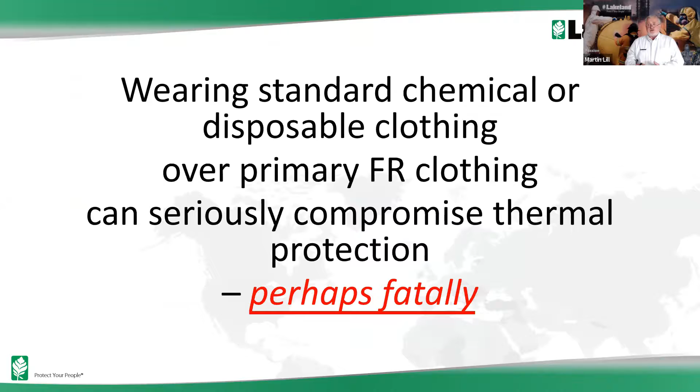But is it proven, you may ask? How do we know this? That is logical, but how do we know it? Well, in Lakeland, we've done testing in the past to prove this point because it's important. And the testing you can use to show it is thermal mannequin testing or predicted body burn testing. So some of you will know that the thermal mannequin test looks something like this.

You have a thermal mannequin, which is a mannequin covered in 123 heat sensors. Each of those sensors absorbs heat energy at the same rate as skin. Then you put the coverall or the FR garment that you're testing over the mannequin, and you subject it to a flash fire from 4 burners around the equipment at a specific calorie energy level, and you will choose a burn length of 2, 3, or 4 seconds. 3 seconds is very common.

And all those heat sensors are connected to a computer, and through that, I won't go into the mechanism, it's pretty complex, but this can then predict the body burn that would occur in that situation. So we've done tests, and here's a body map from one of the first tests we did. Each of those little areas on that map relates to one heat sensor, and the areas that are shaded orange are where it predicts there would be a burn. And in this case, the total predicted body burn was 37%, and there were second-degree burns only.

And that test was done on a primary FR garment only. So that's our baseline test. That's the starting point for us to work from. The body burn that you get just wearing a primary FR garment. 37% second-degree burns only. So then we did another test.

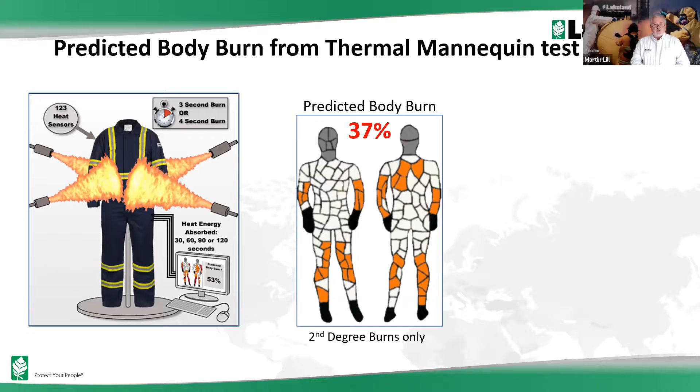We took the same primary FR garment and we put it on the mannequin, and then over that, we put a standard disposable coverall. Polymer-based, this one was a polyethylene and polypropylene mix, and it's a pretty standard disposable coverall that's worn all over the world. And this was the result of the same test. The body burn increased from 37% to 53%.

Not only that, but you can see there are two different colours of shading. There's the orange, which is the second-degree burns, and the red, which are third-degree burns. So they are more critical burns. They're much deeper, they don't heal, they need skin grafts because the nerves are dead. So we've actually increased the burn injury substantially, but also we're getting deeper burns simply because we put the disposable coverall over the primary FR workwear.

So that's the problem. There's the proof that you cannot wear standard disposable or chemical suits over primary FR workwear. You will compromise the thermal protection, and possibly fatally. That 53% is important because 50% is very commonly considered as the possible threshold between a survivable and a non-survivable situation. That's why the NFPA 2112 test in the USA, which requires this test, requires a maximum predicted body burn of 50%.

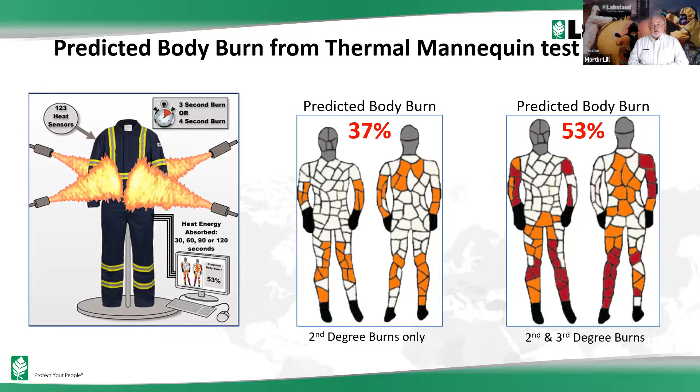Now, of course, you may have been doing this for years. You may have been wearing primary FR workwear and putting disposable garments over it for a long time. And unfortunately, we do hear this in the PPE industry too often: we've been doing it this way for years and it's been okay so far. There was a ship in 1912, and I'm pretty sure that's what they were saying when they were speeding across the Atlantic on the bridge. So far, so good. We've been doing okay so far, and we know where that ended.

You will only have this problem, you will only recognize it, if you have a flash fire event, and if you have a comparison of what the results would have been if you hadn't been wearing the disposable clothing over it. So thinking that it's been okay so far is pretty short-sighted. The fact is, we've proved through that thermal mannequin testing, which is really useful testing, that by wearing a disposable or chemical suit over primary FR workwear, you can substantially increase the injury, the body burn, as a result of a flash fire. So you can't do it.

So the question is, what do we do about it? How can we solve the problem? Well, the answer comes with secondary FR workwear. Now, it's important to understand that secondary FR workwear does not give FR protection. If you wear it on its own, it will give you no protection against flame and heat or flash fire at all. It's not designed to be worn on its own.

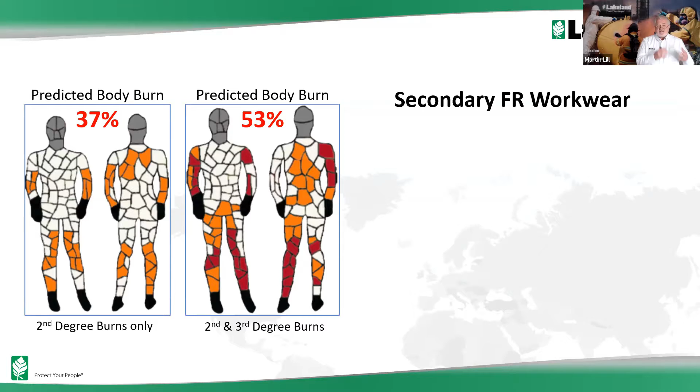What it's designed for is to provide other types of protection, such as chemical, but here's the key, without compromising thermal protection. So that's what we need in this situation. We need secondary FR workwear that actually works, that we know will not compromise thermal protection and will not increase body burn in the event of a flash fire.

So, just 1 second. Just 1 or 2 questions coming, but I think I'll deal with them towards the end.

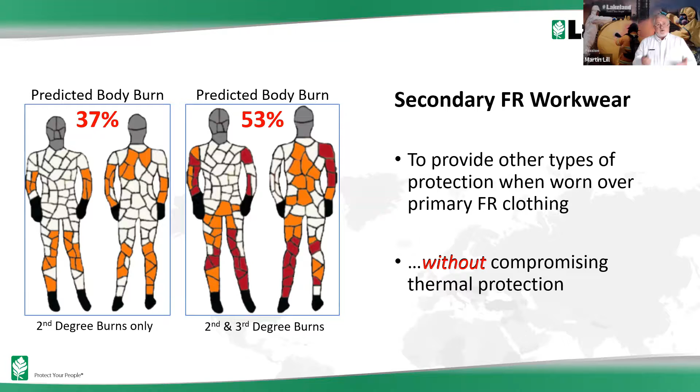So what do we do about this? We need secondary FR workwear, but how do we know any secondary FR workwear will work, that it won't increase body burn? Well, let's look at the standards that we have at the moment for secondary FR workwear, and let's look at whether they solve the problem and whether they tell us the right information to make the judgment. And we're going to look at both USA standards and European standards briefly.

I'm a big believer that our primary consideration here is protection. We don't follow standards and apply standards just because we have to legally, because they apply locally. We follow standards and apply them because they improve protection. And if you approach it that way, then I think we should look at all standards, whether US or Europe, and choose what's best amongst them, because we should be getting maximum protection. But let's look at the 2 standards that apply in this case. In the USA, we have NFPA 2113. And in Europe, we have EN 14116.

So first of all, in the USA, NFPA 2113 could be viewed as a partner standard to NFPA 2112. NFPA 2112 is for primary FR garments. 2113 relates to the selection, the use and the care of NFPA 2112 garments. And it refers to garments that are worn over your primary FR workwear, over the garments certified to NFPA 2112. Unfortunately, there's no testing defined. It doesn't define any testing to assess it.

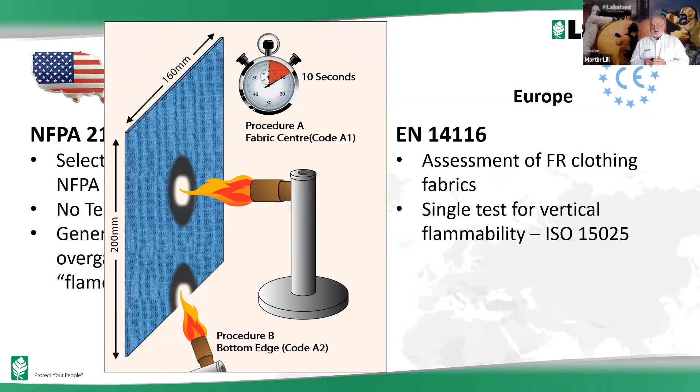And they are index 1, 2, or 3. And secondary FR garments, garments worn over primary FR garments, should be at least index 1. And that means essentially that there should be no burning, it shouldn't ignite, and it shouldn't burn or melt to the edge of the sample. So once that flame applies, if the fabric burns to the edge, to any edge, or melts to any edge, or if there's any dripping, then it will fail and it can't be certified to that standard.

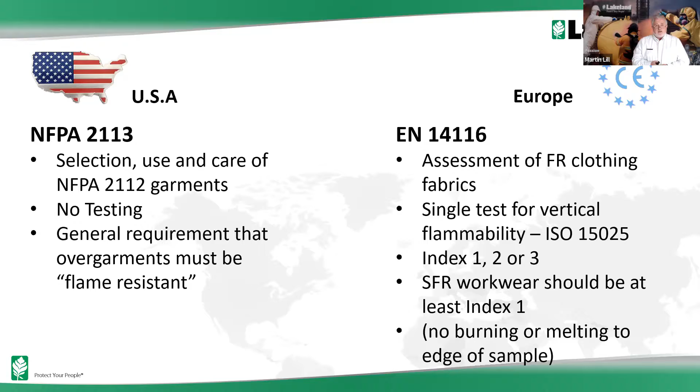So that is better than NFPA 2113. At least there is some testing there, and testing that confirms that the fabric is unlikely to ignite and continue burning. Well, the problem is, it's not actually testing these garments in the way that they are used in the real world. That is, as worn over primary FR workwear. There's no testing that looks at that at all.

So my view is that the current standards in North America and Europe simply fail to provide effective testing for secondary FR workwear, which is a concern, or at least it was, because there's a new name in town for secondary FR workwear, and that name is ANSI 203. Now, I'll confess here, this was actually introduced in 2018, but I only found out about it when I was in the USA 2 weeks ago. And when I looked into it, I was very encouraged.

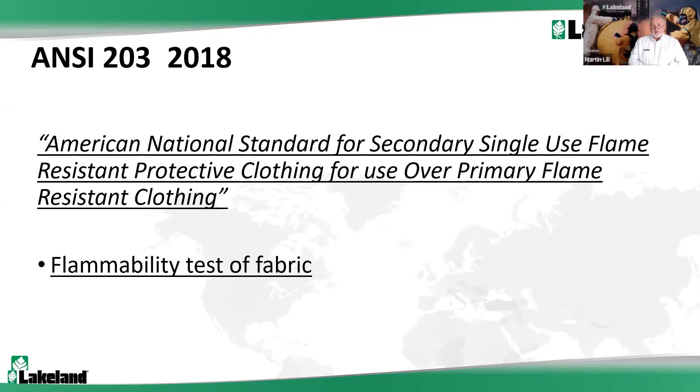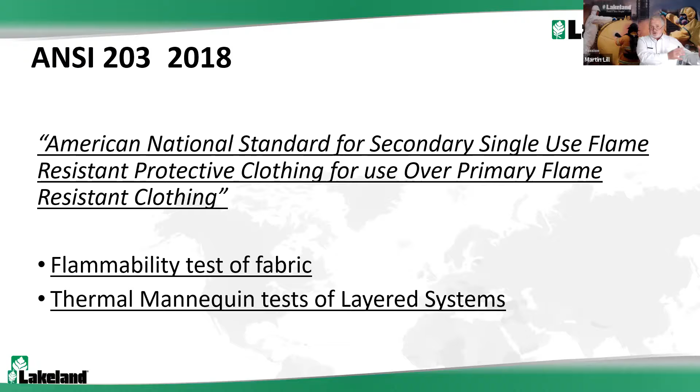Now, ANSI is the American National Standards Institute, and this standard is the American National Standard for secondary single-use flame-resistant protective clothing for use over primary flame-resistant clothing. So it is specifically designed for testing of garments that are intended or may be worn over primary FR workwear. And it contains two required tests. First of all, there's a flammability test of the fabric, which is similar to that vertical flammability test I've just shown you in the European standard. But more importantly, it requires thermal mannequin testing of the layered systems to predict body burn in the way that we saw earlier in the presentation.

So what it does is this. It requires two tests. First of all, it requires a test on the primary FR garment alone, as we did before, to prove the point about wearing standard disposables over primary FR workwear. So that's the first test you do. Again, that's the baseline. And then it requires that you do the same test where you test the garment that's going to be worn over the primary FR workwear as it's used, i.e. over the same primary FR workwear. So you do two tests, the second one being the layered system, and you have to do them at the same time.

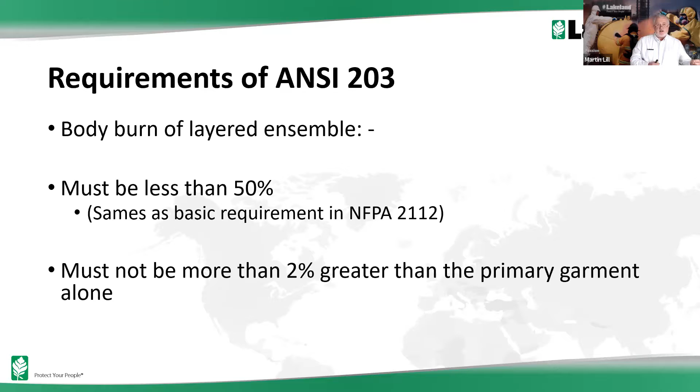And it requires two things. The body burn of that layered ensemble, the second test, first of all, must be less than 50% predicted body burn. That's the same as the basic requirement in NFPA 2112, and it relates to that concept that 50% is the sort of survivable, non-survivable threshold. But more importantly, it requires that the predicted body burn of that layered ensemble must not be more than 2% greater than the result of the primary FR garment alone. So that's exactly what we need for secondary FR workwear.

ANSI 203 tests secondary FR workwear as it's used in the real world, as a layered system over primary FR workwear. And secondly, it ensures that secondary FR workwear at least does not increase the body burn, not substantially, not more than 2%. So for the first time, we've got a standard in ANSI 203 which actually provides the testing needed for secondary FR workwear, which is great. Now, I know this is a North American standard. Like most North American standards, it's not compulsory, it's voluntary.

But whether you are in North America or anywhere else, my suggestion for any garments that you wear over primary FR workwear would be that if you don't follow this precise standard and apply it specifically, you should at least apply its principle. So if you're wearing garments for any reason over primary FR workwear, you need to have thermal mannequin testing of the primary FR garment on its own and the combination of the two garments to make sure that the secondary garment is not going to increase body burn and that it will not cause a hazard. Because you saw with the disposable test earlier on just how much the thermal protection from the primary FR garment can be damaged by wearing the wrong garment over it.

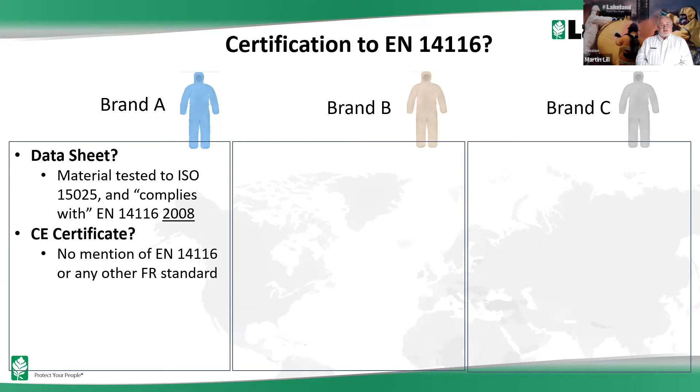But what about the actual certification? So I downloaded the CE certificate and was surprised to find there's no mention of EN 14116 at all, or any other FR standard for that matter. So basically, this brand A is not certified to any FR standard at all.

What about brand B? Data sheet claims flame retardant, and it claims flame resistant treatment in another point on the data sheet. But when you download the certificate, again, no mention of EN 14116 or any other FR standard. Again, like brand A, brand B is not certified to any FR standard.

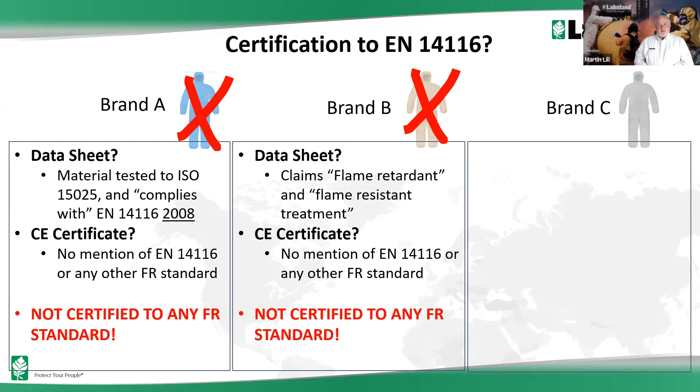Brand C, the label states that it is certified to EN 14116 2015. But actually, if you read the Declaration of Conformity, it claims it's certified, but applicable to the fabric only. Well, as I said, the 2015 version of the standard specifically introduced new requirements for testing of the components, the zip and the seams, and it specifically requires, for obvious reasons, that the zip must function at least once after the test. But this is to the fabric only.

My understanding was that you can't certify to part of the standard, but this brand C appears to be certified to a bit of the standard, part of it. So, okay, let's give that one the benefit of the doubt and at least put a question mark.

But the point is, lots of people in the market, they were very commonly sold. Interestingly, I was told a couple of weeks ago that they're not actually sold in North America now, probably because of that new ANSI 203 standard. But these are very commonly sold in the rest of the world. But actually, if you look at them, the FR claims are certainly not backed up by proper certification.

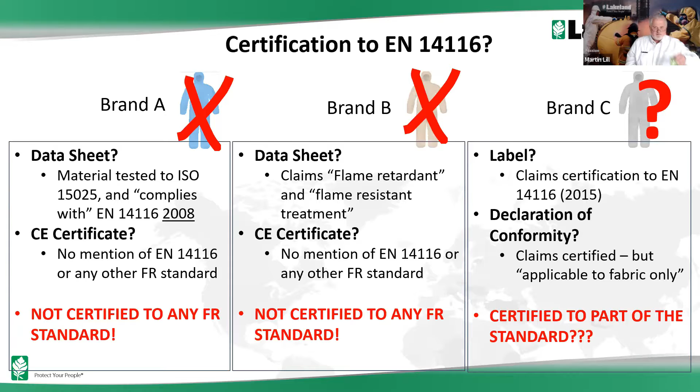So, okay, we thought, let's look more into these products and let's do some independent flash fire testing of these garments, like we did before. So first of all, we did this 2 or 3 years ago. We did a flash fire test, that thermal mannequin test, on a standard SMS product worn over primary FR workwear.

So this is the version of this garment that's not FR treated. It's the standard plastic disposable coverall, and the resulting body burn was 20.5%. Now we'll note that's different figures to the previous ones. That's because the parameters of this test were different. We chose for various reasons a shorter burn in this test, so the body burn level is lower. But it's the comparison of body burn that's important. So that was the first test on the non-FR treated garment.

And then we repeated that test with the FR version of the same garment, the one that's treated as FR and claims to be flame resistant. And the result was this, 19.6. Hey, it's lower, but it's less than 1% lower. And interestingly, there's still second and third degree burns. And actually, if you look at the proportions, we found that the third degree burns in the second test were actually more than in the first test.

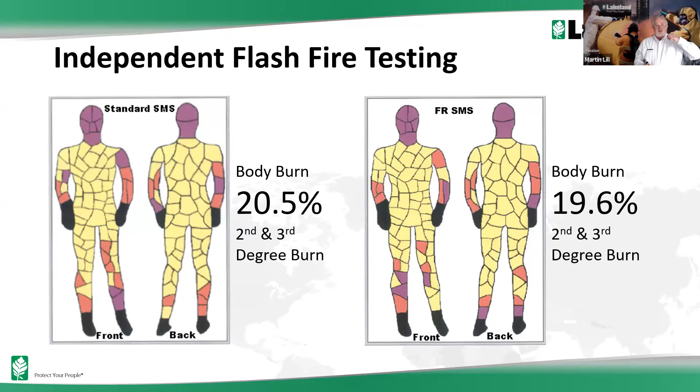So what's that telling you? It's telling you that, okay, one has an FR treatment, but when it comes to how these garments are actually used in the real world, you're not really getting any difference in performance between the FR version and the non-FR version.

So just summarizing the points about those FR garments that are in the marketplace right now, and the big brands, the manufacturers are not providing any body burn prediction tests, any flash fire testing. I think that tells us something. Brand A and Brand B are not certified to any FR standard. Brand C apparently is certified, but it's ignoring the requirements that were introduced in the 2015 standard.

And finally, the independent testing that we've done suggests there's almost no difference in the performance between the FR and the non-FR version. So the question I would ask is, what are you paying for? Because you will pay more for the FR version than the non-FR, but you're not really getting any difference in performance.

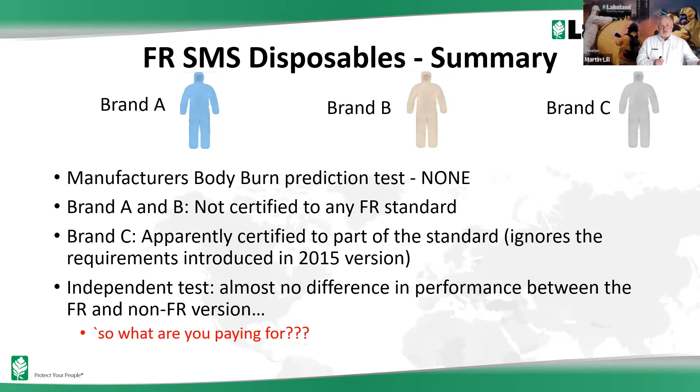So one of the takeaways I would hope is that if you are using these FR disposables, then I would suggest that you go away and have a look at the detail, have a look at what it says in the data sheet, have a look at how they are certified and whether they are certified to an FR standard at all, and then make decisions accordingly. Because maybe you need to find something better that is proven to work.

So I'm going to draw some conclusions now. I think you've listened to me for long enough. But what have we learned from this? I think there are 4 key things. First of all, you really cannot wear standard disposables or chemical suits over primary FR clothing. You can't do it. We saw in the testing that you can critically damage the FR protection that you get from the primary FR clothing. So if you are doing that, you are putting workers at risk of serious injury.

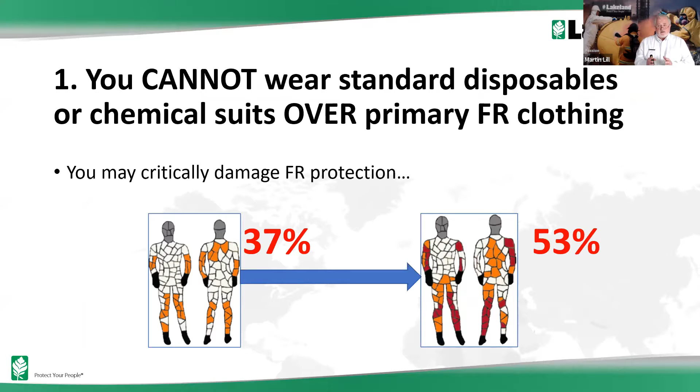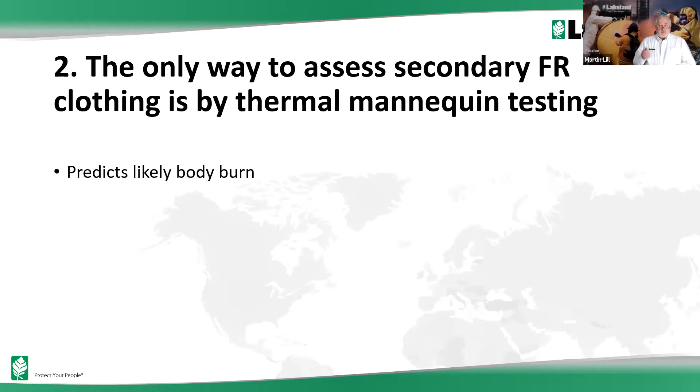Second, the only effective way to assess any garment that you're going to wear over primary FR workwear is through thermal mannequin testing. It's not cheap, it's an expensive test, but it's a lot cheaper than having somebody seriously burned. The thermal mannequin testing predicts likely body burn in a flash fire situation. It's the only method in use that tests these garments as they are used in the real world.

And it's the only one that will actually give you a good indication of whether the secondary FR garment, the garment worn over the primary FR workwear, will increase body burn and constitute a hazard. So it's really important that we have that testing applied more for these types of garments.

Third thing, the existing standards that we've had for garments worn over primary FR workwear have been very limited. In fact, I would say largely inadequate for testing of FR clothing layered systems. We do have this new standard, ANSI 203, which does provide the information you need to know that you are safe.

And I would say, even if you don't apply that specific standard, do require that principle of testing the layered system and getting a comparison with the primary FR garment alone, so that you know that your secondary garment is not going to increase body burn. So even if you don't apply the standard, please apply the principle. Require the manufacturers to get that information for you.

And finally, a note about these FR SMS garments. I've had concerns about them for a long time. As I say, I was told they are rarely sold in North America now. We looked at 3 specific brands. As I say, for obvious reasons, I'm not going to name them, but if anyone wants to contact me afterwards, I can point you to the information where you can confirm all this.

They are not certified, or at least not certified properly. One of them seems to be partly certified to any FR standards. There's no manufacturer's flash fire testing provided, and the testing that we've done indicates that there's very little difference in performance between the FR and the non-FR versions.

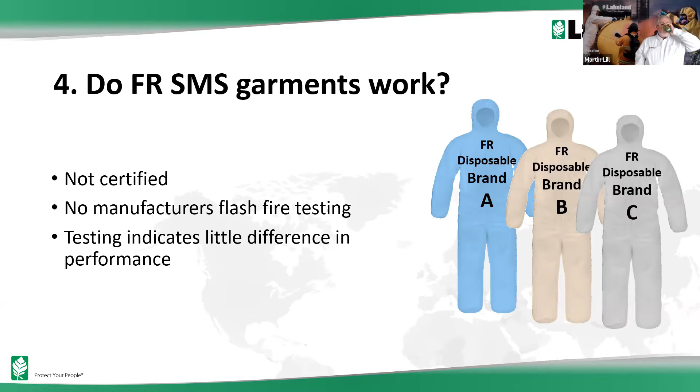So I'm going to draw to a conclusion now. If you remember, I started with a promise or an intention to convince you of three things. And that was that existing PPE standards fail to address this issue. Hopefully I've done that by pointing out that none of the existing ones until ANSI 203 address these garments as they are worn in the real world.

Secondly, this new ANSI standard does precisely what is needed for this type of situation. So even if you don't use the standard, do apply its principle. And thirdly, some secondary FR garments are not what you think they are. Hopefully with the analysis I've given you, I proved that.